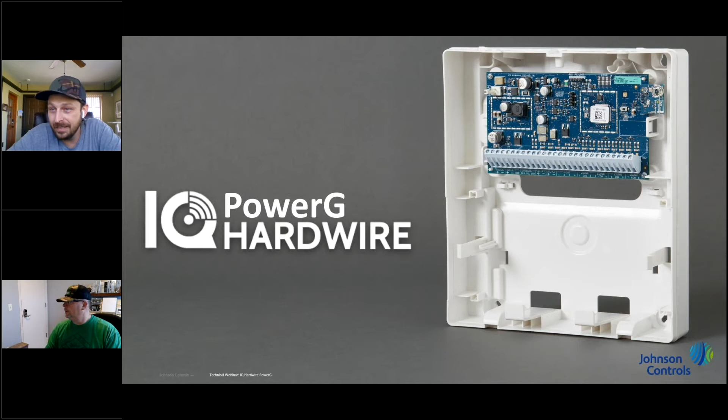There's Neil in Edmonton, Mark in Colorado, Joel in St. Petersburg. Okay, hold on, we've got some questions in there. Anthony saying he's getting no sound. Oh, now he's got sound. All good. We've got David from Huronia Alarms in Central Ontario, Brian from Boston, Ben from Atlanta, Joseph from Millersville, Frank from Wappingers Falls, Ryan from Rhode Island, Kevin saying we look good. Well Neil, I can't see those questions, so I'll trust you're being accurate here. But everybody looks like they have sound. We've got Michael from Germany, Peter Suica from Lake Arrowhead, Ronald from Yarmouth, Anderson South Carolina, Portland, Prince Frederick, McKenzie Tennessee, another person from Edmonton. Welcome, it's not too cold here yet. New Jersey, New Milford, Vintage Security and DC metro area, Kevin from Utah, Brendan California, Ryan in Rhode Island.

So the IQ PowerG hardwire module - if you look at this, the part number is there in the top parentheses, the PG9 WLSHW8. It's a lot easier to say the IQ Hardwire PowerG, but if you need the part number, there it is. This is essentially a module that's going to give you a smooth transition path from those legacy hardwire systems that you would traditionally do in an old school hybrid system over to our PowerG wireless. So you're going to get all the benefits of a hardwire system, but easily transmitted back to an IQ2 Plus. Inside the plastic enclosure is the actual PCB.

You're going to have eight hardwire zones built into every unit. You're going to be able to add 2 of these units per panel, so you can get a total of 16 zones. You're going to have PGM support, which if you're not familiar, is a legacy term we used back in the DSC days for programmable outputs. These are programmable for different types of applications. You can have them follow different events like system alarms or opens and closes to specific zones and so on and so forth.

We'll give you an example of some of these things as we go through the live programming, because there's a lot to it, and even more with the IQ2 that we can do that we couldn't do even back in the DSC days.

If you pair up two of these, you're going to have a total of 8 PGM, so a lot of capabilities there. We have life safety support built in as well, so you can do your 4-wire smoke detectors and CO detectors that may already exist on the install.

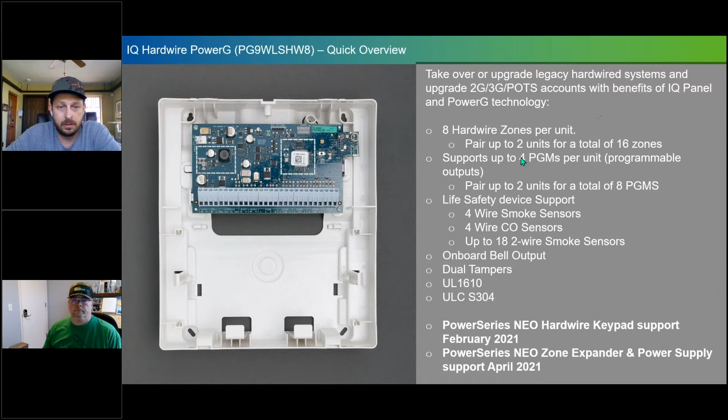This being a hardwire-to-PowerG module, you're able to go into any existing installation that has all these different hardwire devices, whether photo beams, indoor or outdoor sirens, carbon monoxide detectors, your 2-wire or 4-wire smoke loops, gas detectors, motion detectors, whatever they may be, and attach them to this module to convert them over to PowerG wireless.

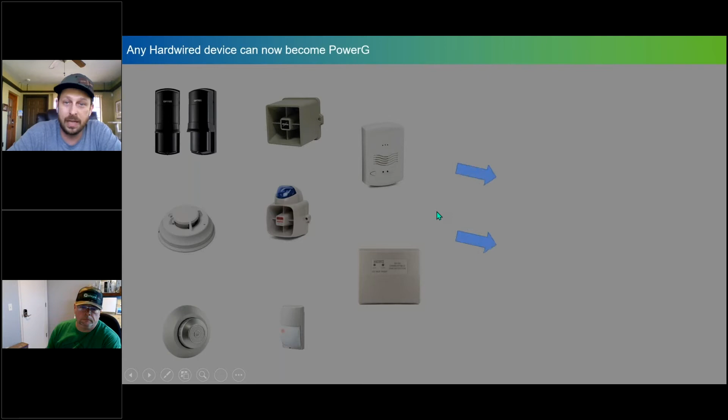Why is that beneficial? That's going to give you guys a ton of extra cost back into the job. You're not going to have to add wireless devices to the system if they already exist. You can just buy this one module, wire all of those in, and enroll them like you would a wireless sensor. So essentially you're turning a hybrid system into a true wireless system.

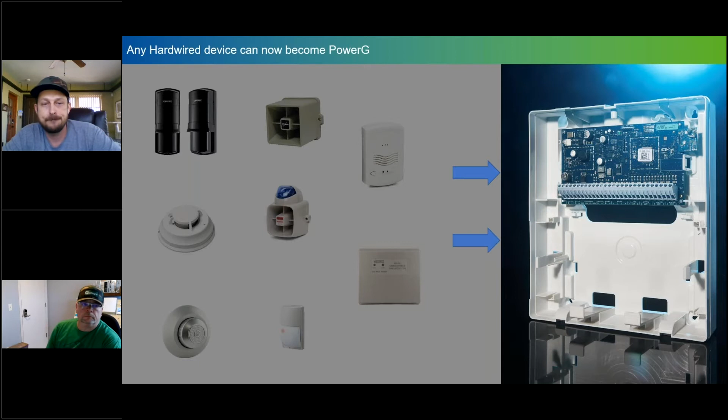This slide, we want to give you guys a quick example of some additional things we can do with our PowerG converter utilizing PGM outputs. Maybe you have a customer who has a traditional system where they're utilizing an output to trigger a gate or something to open up.

We can actually tie this into our system now, using the PowerG to hardwire module, so that you can use the key fob to disarm the system, and that disarm state can follow a PGM to trigger an output to open a gate for you, or whatever other application—maybe a siren, a strobe, an LED, or whatever function you need.

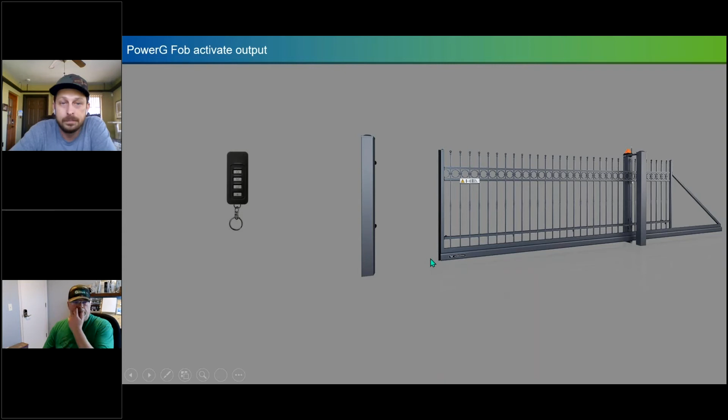Neil, you're muted, buddy. Is that the phrase of 2020? You're on mute.

I'll apologize in advance whenever we're demoing this stuff live—it may or may not work.

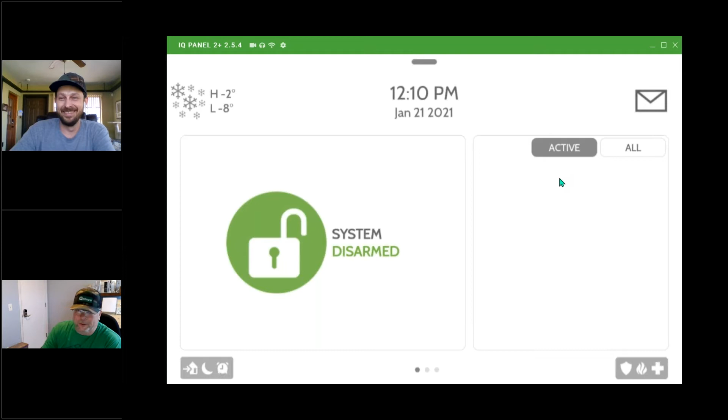So I'm going to enroll my module first. Easy enough: settings, advanced settings, into your installer or dealer code. You're going to hit installation, devices, security sensors, and then go to auto learn sensor. I'm going to hit auto learn—hopefully this works. You never know with a live demo.

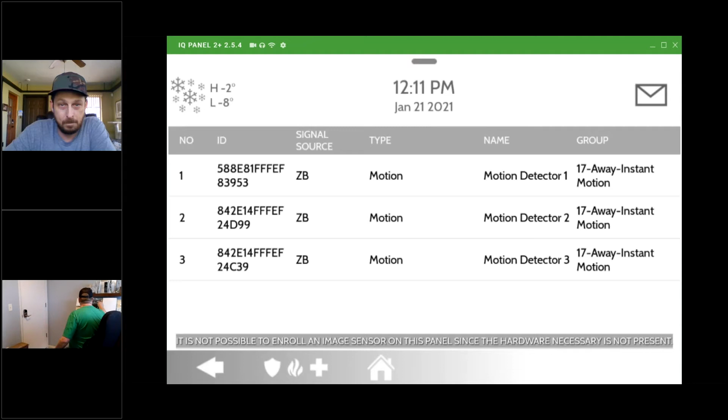Neil, what are you doing right there? So I just held the enroll button for just about 2-3 seconds until it turned, we'll call it yellowish or orange.

So right away we are getting the auto learn PowerG sensor on there. I'm going to hit OK.

Hey Neil, can I show them that process really quick, if you don't mind? So yep. On the module, there's an enroll button, and you would hold that enroll button down until the LED lights up, and then release it when it lights up solid. It takes 3 seconds, and that will then allow it to be paired with the panel.

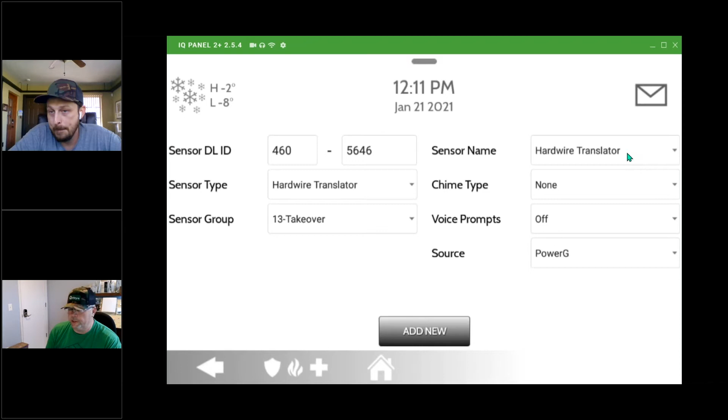So the panel will automatically recognize it as a hardwire translator. It's the first one being learned into the system, so it will give you a sensor name. Obviously, you can change it to whatever you wanted to call it. So we're just going to hit add new. So what you'll notice is it'll start adding the sensor.

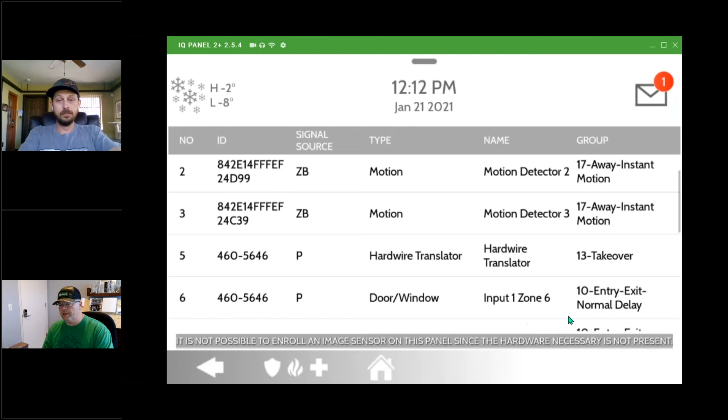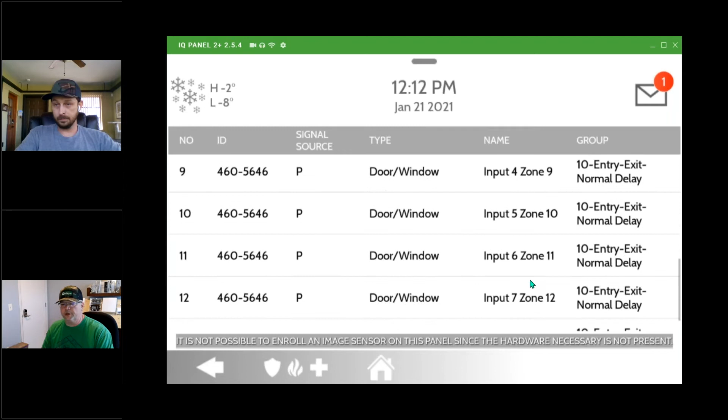And then it's actually going to populate all of the zones automatically, right? So the one thing you'll notice is it's starting. I'm going to switch to my mouse here. So input 1 is starting at zone 6. And the reason being, I have other devices already enrolled in the system, but we have the intelligence in the module to say input 1 being the first set of inputs on the IQ Hardwire PowerG, and it's going to be populated in zone 6. It's going to put everything in as an entry exit, but it's all learned in already.

So I'm going to go out of there. You'll now notice this new box shows up. Right? So PowerG output rules, and that's where we're going to show you how to activate or create PGM rules. One thing we've got a lot of feedback on is people wondering how to activate the fire loop.

I just need to look at my number, 5646. To activate the PGM2 for a fire loop, super simple. You're just, instead of auto learn, you're going to hit add sensor. You're going to type in the PowerG serial number of your device, like that. And right away, you'll see sensor name smoke, PGM2. So it's now enabled PGM2 to be a dedicated 2-wire smoke loop.

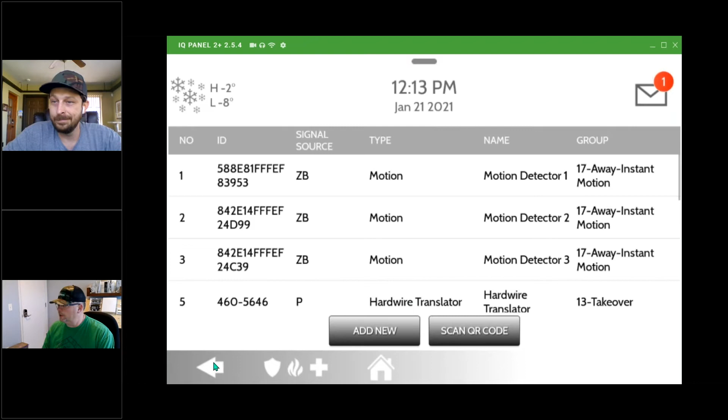I'm going to pause there. You got anything, Joel, you want to add at this point? No, I was just curious if any of the guys had any questions coming up that are pertinent to what we're doing right at the moment. Mark? No, sir. Some of the questions that are coming in we're handling in the background, but not exactly what you're covering at this moment.

So we'll just keep answering, and you guys keep rolling. Thanks. All right, perfect. Hey, Neil, I have a quick question. Can this support polarity reversing?

Okay, so currently, officially, no, we do not support polarity reversal. It is something that, again, we've heard the feedback from the field. There's a strong demand for it. So ironically, we did have a meeting earlier this week, a bunch of us with our engineering group, and we are working on, we'll say, certifying the module to be able to do polarity reversal. So in the meantime, if you need one sound, all sound, we just stick with the PowerG wireless smokes for now.

Exactly. Okay, so we're going to go in and start creating a PowerG output rule. So I'm going to click that new box again. It's now showing up because we have learned in an IQ Hardwire PowerG. It's very, very smart, obviously. PGM 1, 2, 3, 4. PGM 2 is now locked because I did enable the 2-wire smoke detector loop.

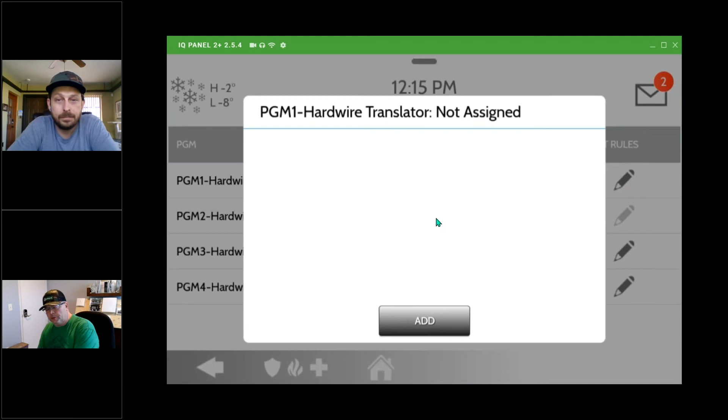So we're going to create a PGM on, we'll call it PGM 1. Okay, so it's showing that there's no current rules associated to PGM 1, so I'm going to hit add. And we're going to call this test 1. Nice and simple. Okay, so the first thing it's going to ask you, my keyboard, is your output type.

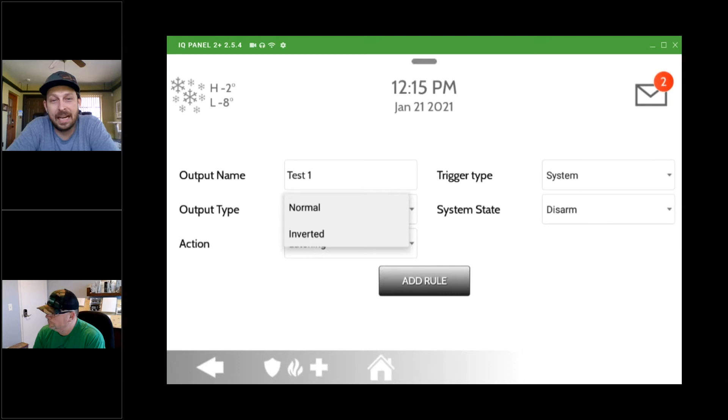So do you want it to be normal or inverted? Joel, you want to explain the difference between normal and inverted? Activated versus deactivated. There you go. So we're going to go with normal.

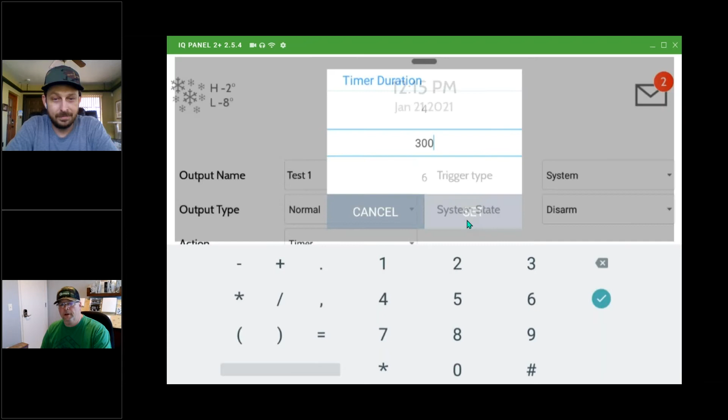And then you have your next option is your action. So you have a latching or a timer. Right? So latching, obviously, your PGM will latch in that state, or you can use the timer functionality. And I think you're going to be pretty impressed what we've been able to pull off from a timer standpoint. You can actually get up to 300 minutes on a timer. So trip your PGM, 5 hours. You could have a trip for 5 hours if you wanted to. We'll leave it as 5 for now.

Okay, and then your trigger type, right? So that was your options for trigger type being system or zone. So if we look at system triggers, pretty straightforward - the standard disarm, arming stay. You'll notice that we've also had functionality for exit delays and entry delays or alarms. So those are your system triggers.

So in this case, if we wanted to trip PGM1 for 5 minutes on disarm, you're all set up, and now the output rule has been created for PGM1. One of the great things about our engineering software - is that the only rule we can do for that PGM? Oh no, our engineering software team has literally taken, as far as we can tell, we have no limit to the number of things we can program on a PGM. You're only limited by what you're able to do. So if we actually wanted to go in and edit that rule, I could edit the current rule, or I could add another one to PGM1.

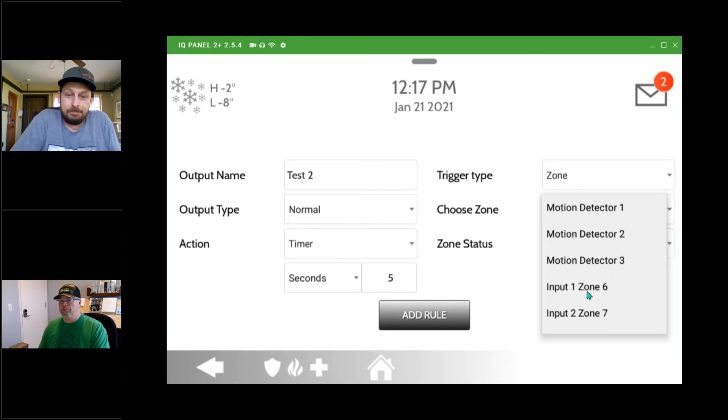So in this case, let's say PGM was a piezo. We're going to say it's now test 2. It's also going to be normal, still latching, but now I want it to trigger if a zone opens. So I could just pick this motion detector - we'll use something from the wire to wireless, zone 1 on the IQ Hardwire PowerG, so input 1, zone 6, and now you can have open or closed. So now that exact same piezo that we have triggering on a system disarm can now have that exact same PGM tripping again, based on whatever is on input 1, zone 6, and I'm going to say only when it closes.

So it's still, the rule is called test 2. You could, knowing what it's for, call it piezo, or call it whatever you want. But you can literally - we have run out of ideas trying to get to that theoretical limit. So on my production unit on the other side of me, I have roughly about 12 or 13 different rules running the same piezo.

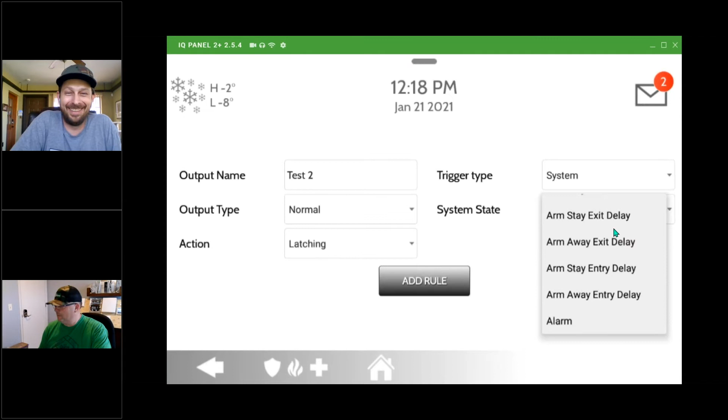Definitely annoys my wife every time I do something, because I'm getting an entry delay and an exit delay at the same point - you kind of get both - and then I'm getting it when I'm arming and disarming. I'm sure it's the panel that's annoying your wife, right? Thanks Joel, yeah 100%, it's the panel annoying her.

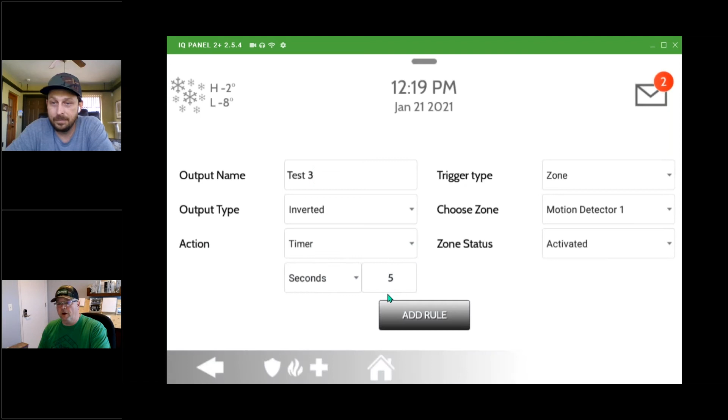The possibilities really are pretty endless as to what you guys are going to be able to do and creatively cover any type of application you may need for this system to send an output status in some way, shape, or form. So again, you could have it trigger every time a motion activates, all running off PGM1. There are now 3 rules - we have a timer on 5 minutes, a latching on normal, and an inverted on a 5-second timer.

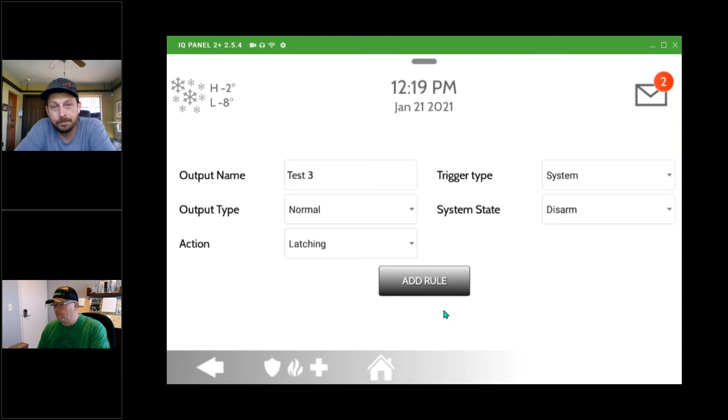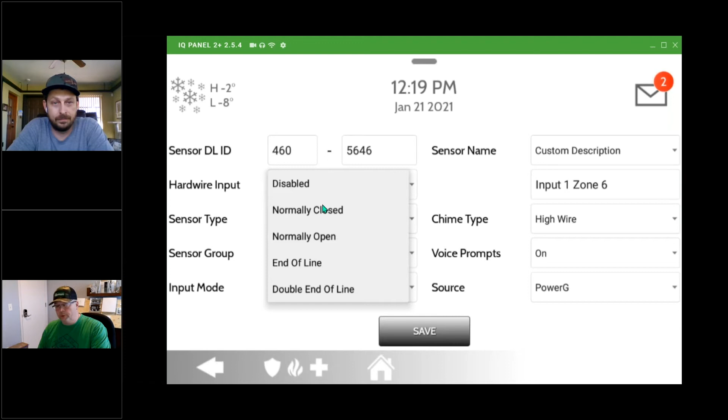Hey Neil, I got one for you - if you enroll this module, do you have to use all 8 zones? No, that's a great question. There's a couple options you have available. You can edit the sensor and just make it not used. So we can go in there and your input mode - one thing I guess we should have shown - this does support single end of line, double end of line, normally open, normally closed loops.

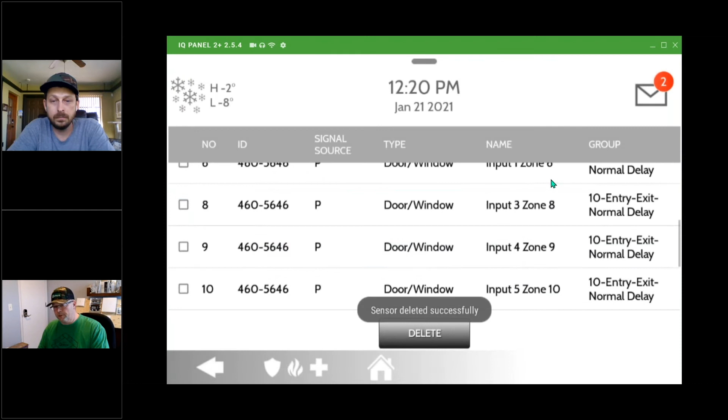So you could actually just click disable, and then that zone will disappear from your zone list as far as being active. The other option you do have is you can actually delete a zone entirely. So if it's never going to be used, let's take off input 2, zone 7. I'm going to delete it, and now it's not even going to show up in our zone list. So now you'll see 6 is disabled, and 7 is now totally gone. We have had dealers do this by accident.

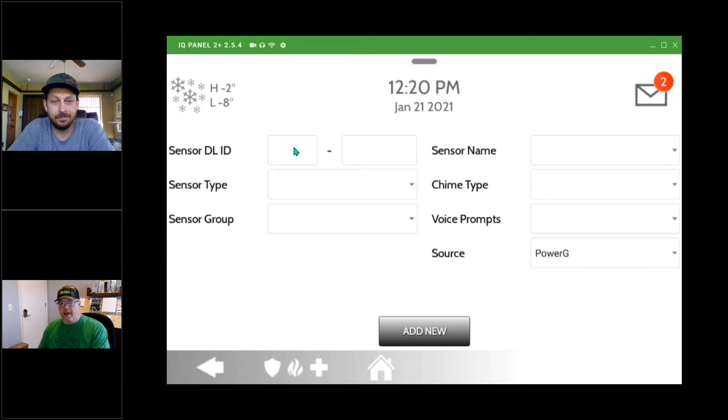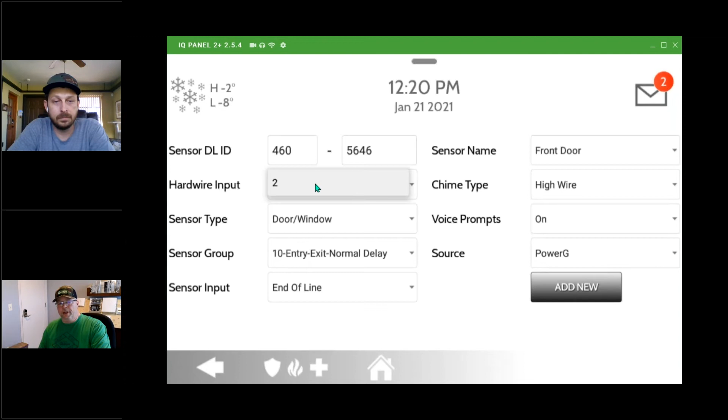So if you ever do need to re-enable it, it's as simple as activating the PGM2 for the smoke loop. You're going to hit add sensor, and again enter the PowerG ID of your module, and now you'll notice your dropdown shows 2 because it's been deleted, right? So PGM2 has already been activated, so it's showing that hardwire input 2 is now available, so to speak. We can add that back into the system.

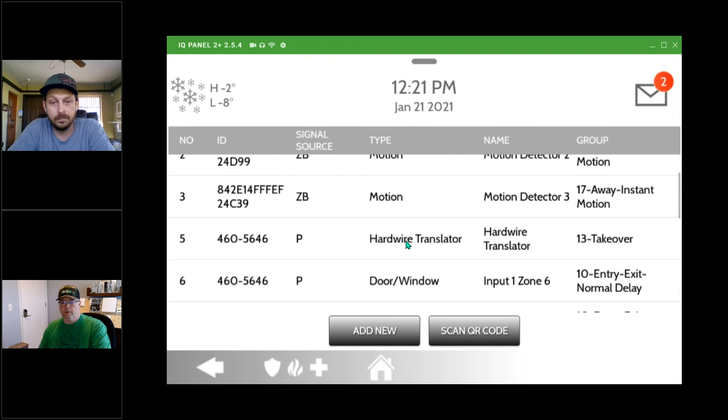And now you'll see that it is back, or should be back in the system. There we go, back in the system.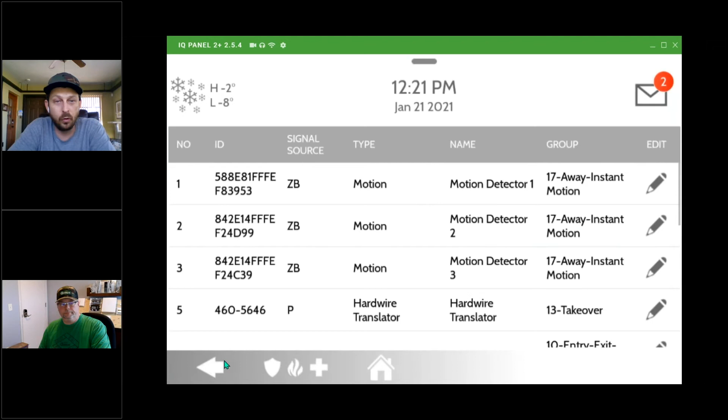And just so we're clear too, the end of line resistance is variable, correct? That's a programmable end of line resistance. Correct, auto detecting, not even programmable. So it does auto detect from 1 to 10k ohms. So basically it's able to take over any existing hardwire system that already has EOL in place.

So there currently is a limit of 2 of these modules per IQ2 Plus. This module will be supported on any of our next generation panels as well. We will be able to offer the same support. And as Joel said, we're going to add the zone expander support.

Later into Q1, Q2. But keypads right now are on track for mid-February, and I got to say they're working amazing. We've been testing these. I've got them on my other panel and they work absolutely fantastic. So for those takeover scenarios where the customer may want a hardwired keypad and they already have a wire run, it's as simple as putting in an HS2 icon or an HS2 LCD keypad, and you're up and running.

So I think that's really as far as we have from a content standpoint. So hopefully we have some questions.

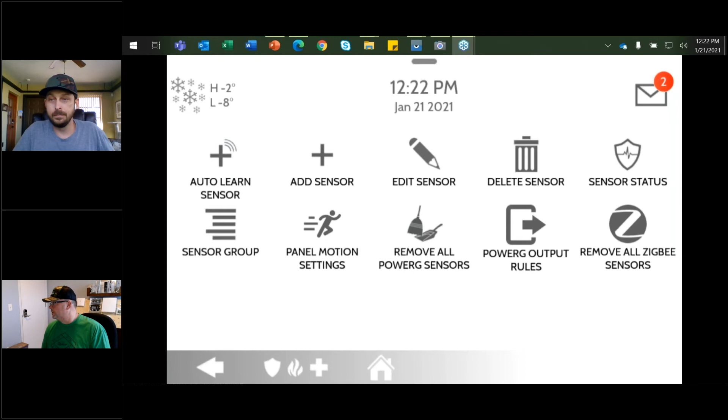Mark, good Mark, I sure hope so. I would imagine, right? So or we're going to be tap dancing for the next 8 minutes.

Hey, no worries guys, I do have one for you to start. Let me go back and find this. Can you have different timers on one PGM triggering off of different rules?

Can you have different timers on the same PGM? Yes, triggering off of different rules. So basically, as you were talking about having multiple rules applied to a single PGM, each one of those rules could have a different timer associated with it? Yep, so even in this one example, we have a timer of 5 minutes and a timer of 5 seconds.

That's a great question, it's a great question. Yeah, well, it came from one of our legacy DSC guys who knows PGMs. Would that come from Dan?

So another question here, let me see. I've answered a few of these. So they asked about posting some diagrams. I've let guys know that they can email me directly.

This question came from Mr. Yip: when wiring the existing hardwire to the PowerG board, do we need to use the existing resistor? So as long as your existing resistor is between 1 and 10k ohm, you're laughing. It'll auto learn it and you don't have to rewire it.

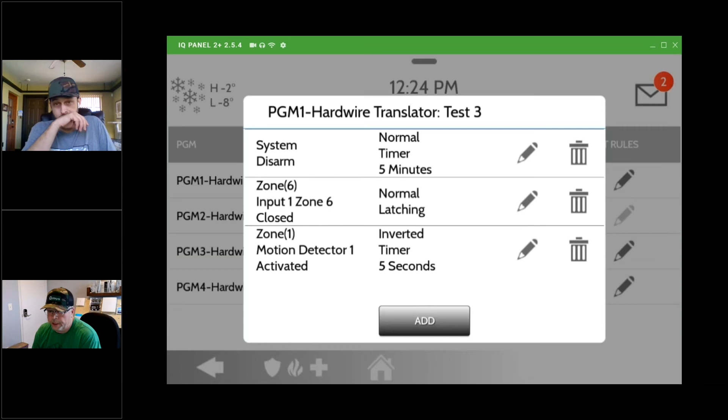Okay, so kind of another question related to that, are all Neo keypads compatible? So we're kind of answering that the touchscreens are not, we're just specific. So it would really only be Neo LCD keypad, not icon and not touchscreen, correct?

Actually, it will support HS2 icons. It'll support HS2 icon, HS2 LCD, and it will support the P versions, so any of the keypads with the proximity sensors. Now the proximity is not enabled, but those keypads are supported. So you could use HS2 icon and icon P and LCD and LCD P. Non-RF versions, by the way, these need to be non-RF version keypads.

Yeah. You can't have two hosts.

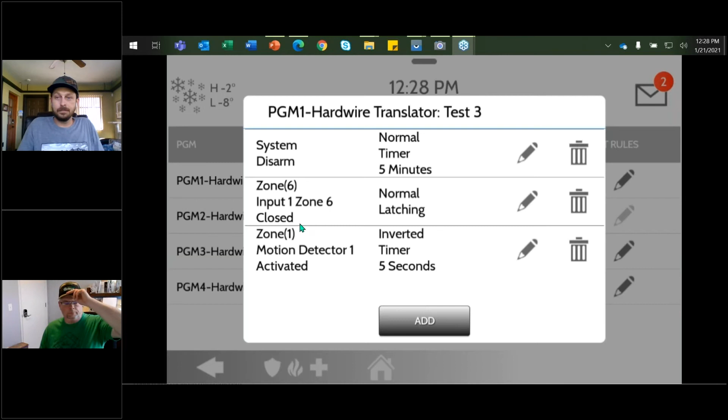From Rich down in New Mexico: when will we have a force arm option similar to the DSC panel line, and also cross zoning? That seems more of a question around the IQ Panel 2 Plus versus this particular module, but happy to answer it. Both of those items are on our wish list for firmware 2.7. No timeline yet, and we can't guarantee they're going to be in, but they are on our wish list, and we actually have a prioritization call this afternoon to determine what's going to be in and what's going to be out from 2.7.

What firmware is required on the IQ Panel 2 Plus? To use just the IQ Hardwire PowerG module, you need 2.5.3, which will enable the module itself. Once we release keypad support, it'll require 2.6. That firmware will be required to support the keypads, because basically what we're doing in 2.6 is, if you've played with one of the modules, you'll notice there's a Corbus on it. So 2.6 will enable that Corbus, and 2.7 would be any further Corbus enhancements.

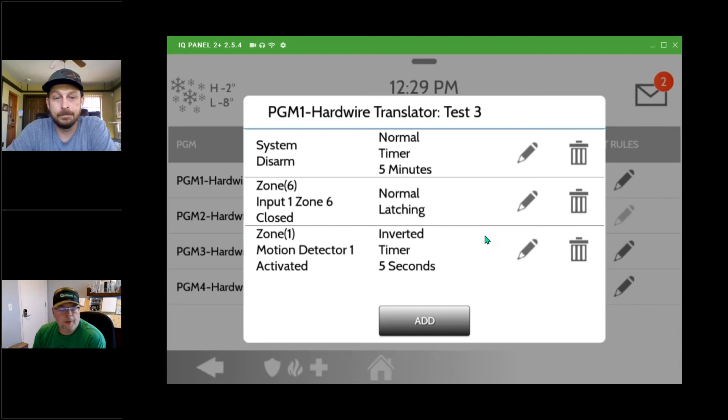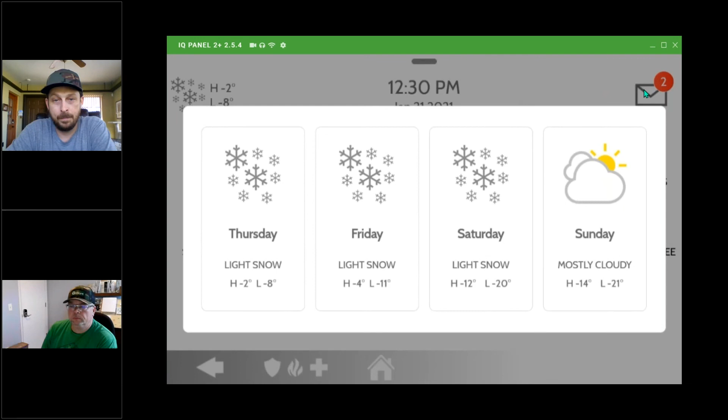Here's a great question that came in. Will this support an integration module similar to an IT100? An IT100 is a serial device that we used on our legacy PC series. Most integration will be over IP going forward. The IT100 will not be supported on the wired wireless or any Neo and Pro panel, due to the fact that we've now moved into 128-bit encryption versus just data capture, which is what that IT100 module was. So, Justin, I know that's a long explanation to say the answer is no, but that's unfortunately legacy integration.

Can I add to this? If you click on installation really quick, since we're talking third-party integration. Click on devices, Wi-Fi. So we have options for third-party integration under the Wi-Fi settings, to whoever just asked that. If you go in there, you'll see an icon that says third-party. That's where any third-party integration will be listed. It's all done via software, all software driven.

We're getting right at the stop time. Do we have any other questions we should answer here, Mark or Mark? Let's see, Mark squared, I'm looking. What about a keypad 160? I'm thinking somebody was asking about a PC series. Oh, something about a keypad added but the prox is not active.

So they're saying that customers love to use prox tags for arming and disarming, and wondering about support for that in the future. We'll definitely go back to the engineering team to see what would be required to activate the proximity function. The keypads themselves are supported, just not the prox tag.

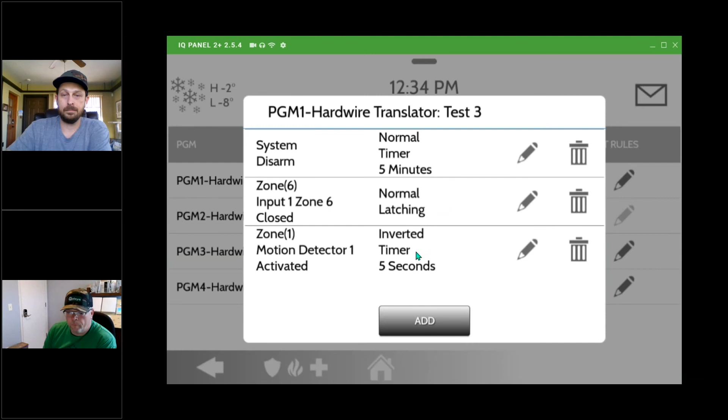There was another question here, hoping you could show how to edit a zone even after it lands on this translator. So what did you want to see in here? Basically he's saying, should it be something that gets blocked if you create one of these test PGM outputs and then try to add another one that counters what you're doing? Should it have a grayed out area or be blocked somehow?

I'm pretty sure... there you go. So if you have something that already exists or conflicts, you'll get this: system state rule already exists for that PGM with the trigger of disarm.

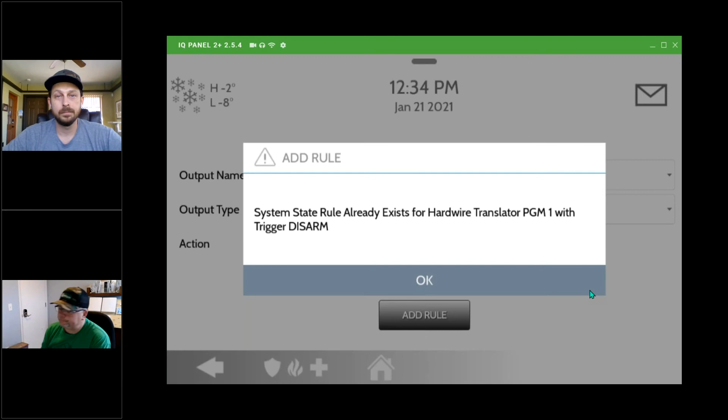Now, for commercial applications they have integration requirements often, and typically they would use a legacy panel like a DSC and integrate it with Kantech. So will the Qolsys in the future use that third-party integration option, maybe a database link or sync to Kantech or EntraPass rules based on alarm events? Can we see that happening, Joel, as you were talking about those third-party integrations in the future?

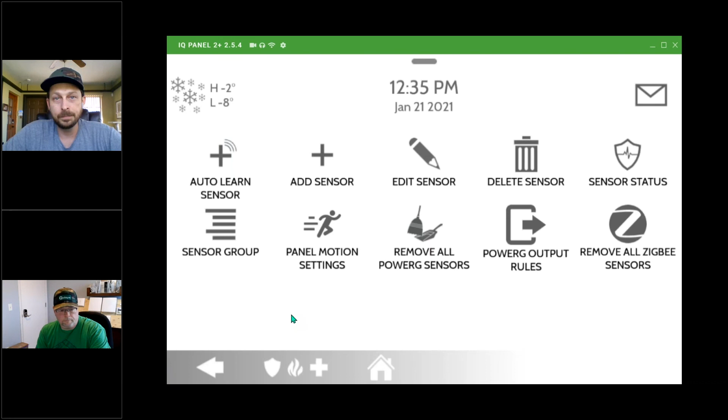Not to be vendor specific, but third-party integrations are growing, so there's not going to be a ton of limitation with that as we evolve, not only this platform but some of our newer ones coming down the road. Third-party integrations are going to grow exponentially in the coming years, and when IQ Gen 4 is released later this year, there will be a lot more, including some sandbox automation apps. So if there are certain vendors you're looking for us to integrate with, reach out to your local TAM or sales manager and they'll get the information to us.

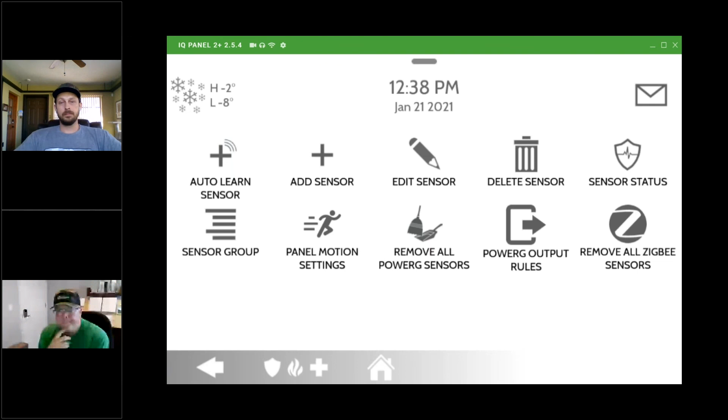We've had a lot of questions, gentlemen, about System Sensor and Cosmod because of the lack of polarity reversal on all of our modules today, so the 16F and this new wired-to-wireless. The Cosmod has a bit more benefit to the market because it's its own independent module, we just need to get it enough power. So the limitation today would be not as many detectors as dealers may want. We need more power, which means we have to add a core bus power supply in order to properly support the Cosmod.

We've got dealers, obviously, that like to break the rules all the time. Not saying they haven't made it work, just like a bunch of other applications out there that are probably not UL. But we're talking life safety and fire, so we need to be a bit more cautious and proceed that way. We just had an engineering call this week, Neil, and it's pretty exciting to think about that being a future for this module. So it's just going to keep getting better.

Today we have that initial release, 8 zones on each module, 2 modules. When we add zone expanders, you'll go up to 32 zones. When we add core bus support, you'll get keypads, maybe power supplies. So let's just keep going.

So Carmen, you were just pushing buttons, thanks for clarifying. Great, is Qolsys rated for commercial burg? Yes, Bob, it is. It has UL 1610, 4 partitions, keypad lockout, 6-digit user codes. So that's a big yes. And for the Canadians, ULC S304, level 2.

Let's see, just for anybody who wanted a step-by-step, I've dropped the instructional manual into the handout section, so you should be able to grab it right from there. Let's see if anything else has come in.